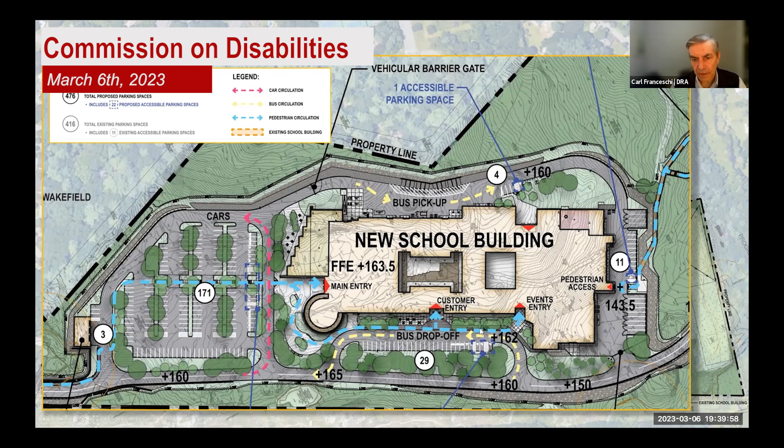If they arrive by bus in the morning, there is a bus drop-off here at the front, and access into the school, again all at grade, is available at those 3 access points across the front of the building.

If they arrive by car, driven by their parents or guardian, they're dropped off here at the main school entrance across this east or west side of the school, and can enter in there.

If they drive themselves and need accessible parking, they can make use of the accessible parking here in the main lot and enter the building. If they park in the lower student parking lot, they arrive at the building back here at this pedestrian entrance after coming up the stairs and ramp up the hillside where it's labeled 143.5. They can come in and access the school and an elevator right at that point as well.

All of these points have just a 6-inch curb with a curb cut away from each entrance. For parents dropping off their young ones at the preschool around the back, there is an accessible parking spot if the parent should need it, and an accessible entrance at grade directly to that preschool area. There's a playground directly off of that preschool area, also at the same level, without going outside, without dealing with the sloping ground or needing to use an elevator or set of stairs.

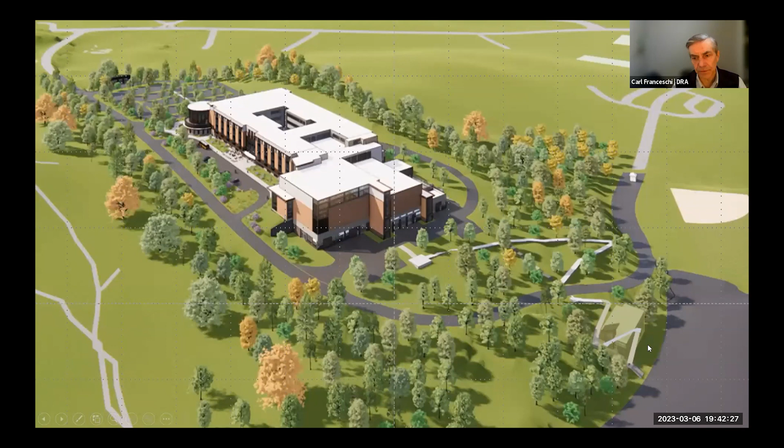So that's kind of the exterior of the building at the top of the hill. Just to give you an overall view, here's how it sits. The existing school is down here to the right, and the athletic fields and parking area will be down there. There is that connecting path that we'll talk about, and you can see the new driveway coming in from Farm Street, accessing the school and making a connection to Hemlock Road at the current guard shack there.

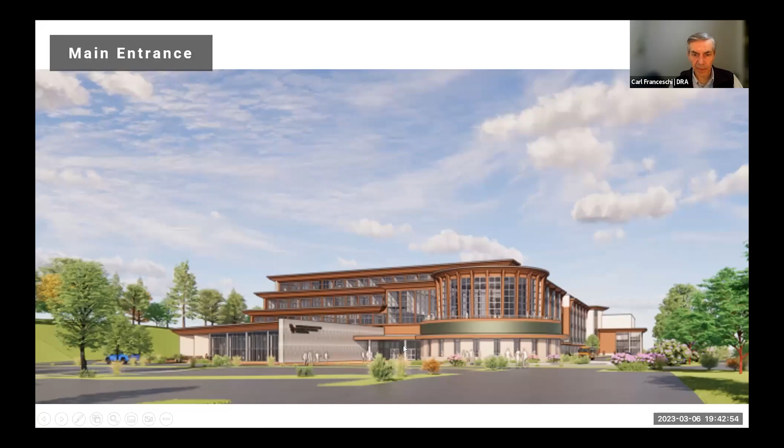And just to give you a feel for the building, as you come in from Farm Street, this is the main school entrance. This rounded portion of the building is the administration area on the ground floor, so there's good welcoming and supervision for visitors. The cafeteria is at this level at grade, and it has an outdoor patio, again at the same grade as the cafeteria.

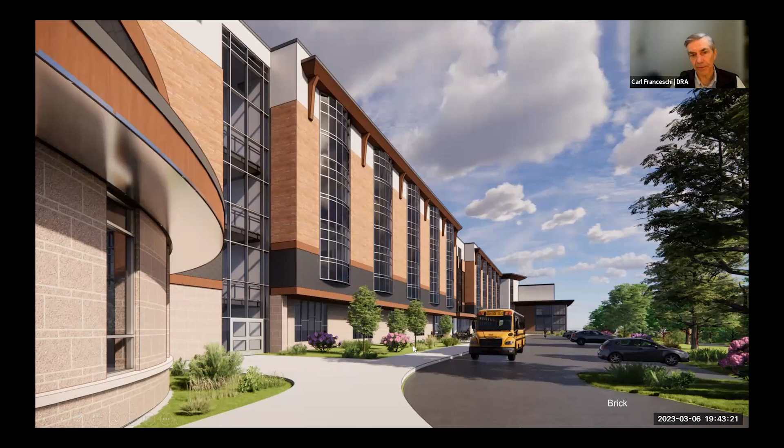Along the front of the building there's the bus drop-off and the multiple entrances along the front. It is essentially a 4-story building at this level. At the far end is what we call the events entrance, where the gym and the auditorium are located, and the customer access is in the center of this side of the building.

And then to talk about the inside of the building, first of all, it's best to say that the entire school is fully accessible and, to the greatest extent possible, universally accessible. As we mentioned, this plan is oriented the same way that site plan was, so the main school entrance is here on the left by the rounded portion of the administration building. There are 3 access points across the front of the building, all of them accessible and related to parking.

The center one being that customer entrance for the public that can come directly to the restaurant or directly to the cosmetology salon. The assembly areas are at the right-hand end of the building, the auditorium and gym, with a dedicated lobby and a dedicated elevator at this end of the building. Diagonally opposite, there's another elevator. So there are 2 elevators in the building that travel to all the levels and carry through each of the upper floors.

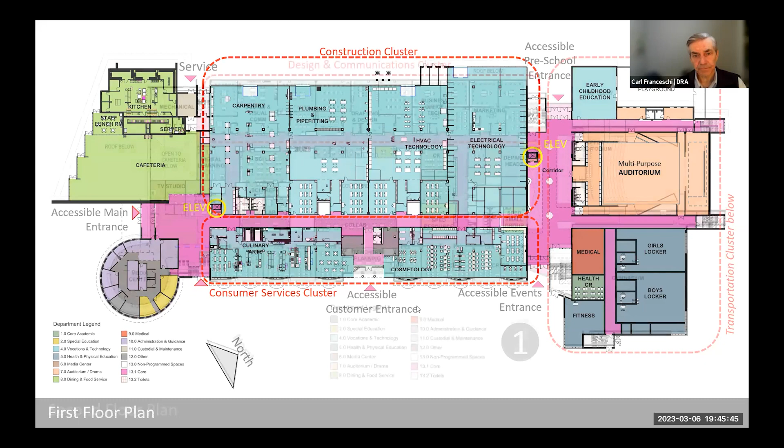The building is organized so that one of the goals of the project was to cluster the career shop areas together, so all of the construction trades are on this floor. Every level of the building is basically flat, with no internal ramps. Each of these large shops has overhead doors that can accept deliveries, and they're at grade as well. The cafeteria is at the left-hand end of the plan, and the gym and auditorium are at the right-hand end.

Going up one level, the building takes the configuration of a courtyard, getting daylight into the center of the building. The career tech areas are clustered together in blue, and the academic science and academic classrooms are in green, wrapping around the other three sides of the courtyard in close proximity to the career tech areas.

The elevators are highlighted there, and you can see them at either end. There are boys, girls, and gender neutral toilet facilities on every floor, and every one of them is fully handicapped accessible. Every shop individually has a unisex, gender neutral bathroom facility as well, fully accessible. Teachers' facilities are located in the teacher planning area on each floor.

Every bathroom, every toilet room, and shower area in the school is accessible. It's not that they're segregated and separated. Much like the superintendent talked about the academic classrooms, the same philosophy applies to accommodations within the building as well.

One of the other unique features of the school is this multi-purpose auditorium. I'll show you an image in a second, but as opposed to a traditional auditorium that has stadium seating, this actually has a flat floor on the first floor and a flat balcony on the second floor, so both levels are fully accessible. The seating itself is retractable, giving it a multi-purpose aspect.

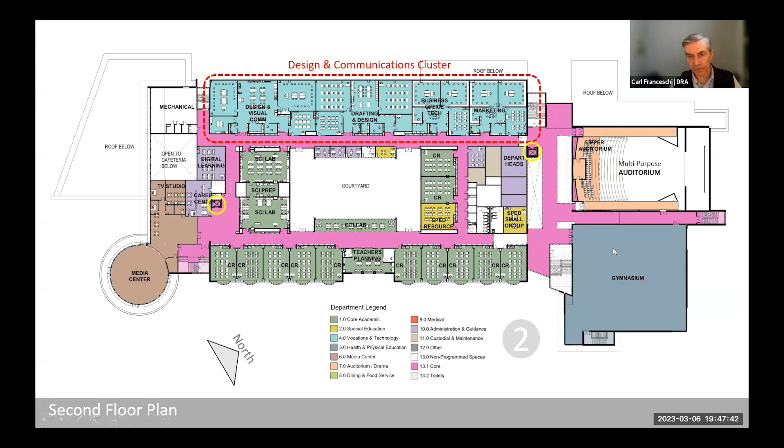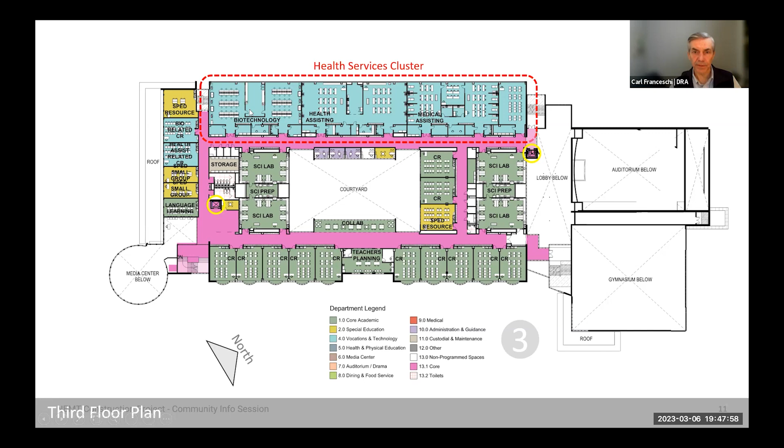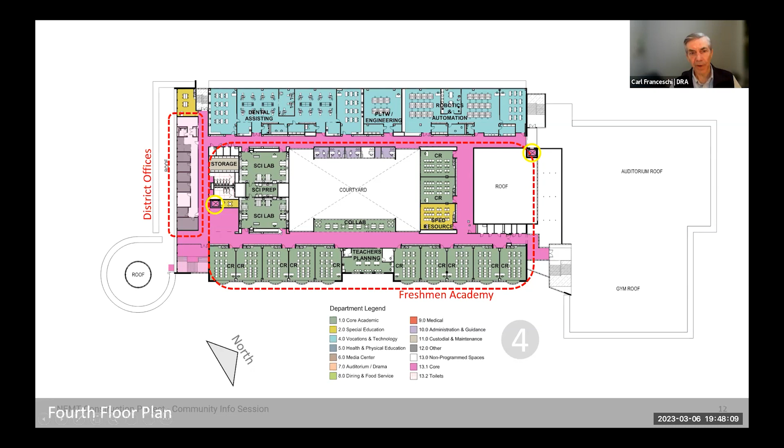Here's the gym, accessed by elevator and stair, directly above the locker rooms below. The upper two floors are very similar, just with different career clusters on each floor. Here's the health services cluster with that new biotech shop, and on the top is the balance of the career tech shops, the superintendent's office, and the balance of the classrooms wrapping around that courtyard.

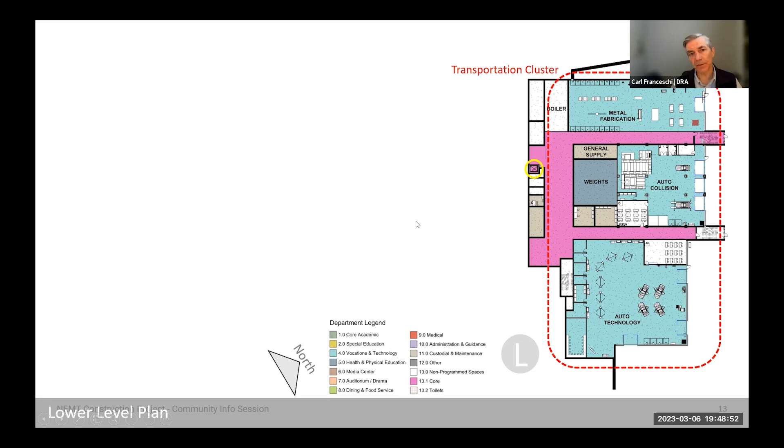Here's the lower level plan. As the building steps down the hill, there's the opportunity to have this lower level, which is built into the hillside on the uphill side, but totally out of the ground on the other three sides with full access at grade, both for pedestrians and vehicles accessing these shops. The auto shop and auto body shop are at this level, and this is the connecting point for students from the locker rooms going up and down the pathway to the lower level, hillside parking, and athletic fields.

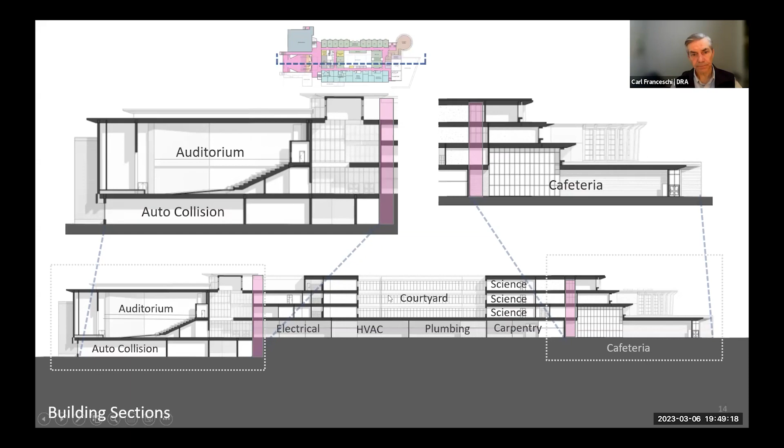If you were to cut a section through the building, this helps explain that it's basically a 4-story building with the cafeteria at one end, the auditorium and gym at the other end, and the building steps down one level at that end. There's a courtyard for the upper 3 floors to get light into all those classrooms, and there are 2 elevators, one at either end of the building.

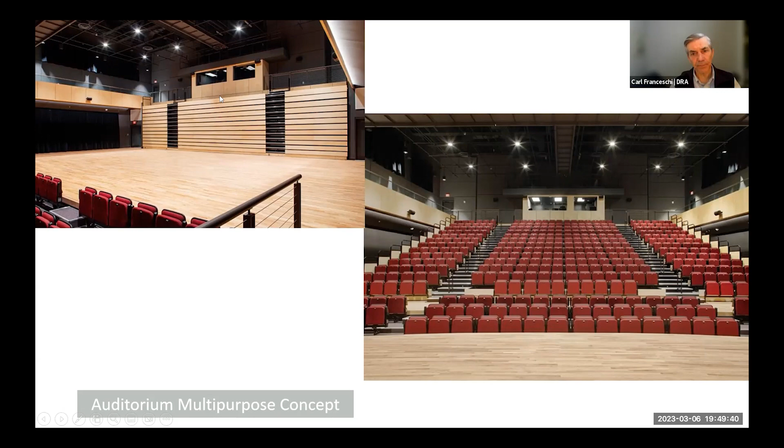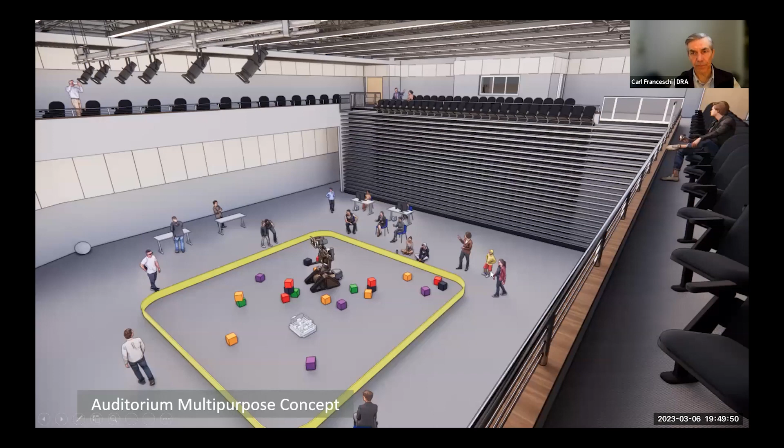This is that multi-purpose auditorium with the retractable seats. This precedent photo shows a flat floor, fully accessible, and a balcony which is also level and flat accessible, so the space can be used as a traditional auditorium when the seats are pulled out, but also for other events like robotics competitions, science fairs, and career fairs when the seats are retracted. The balcony is flat with handicap seating available at both levels.

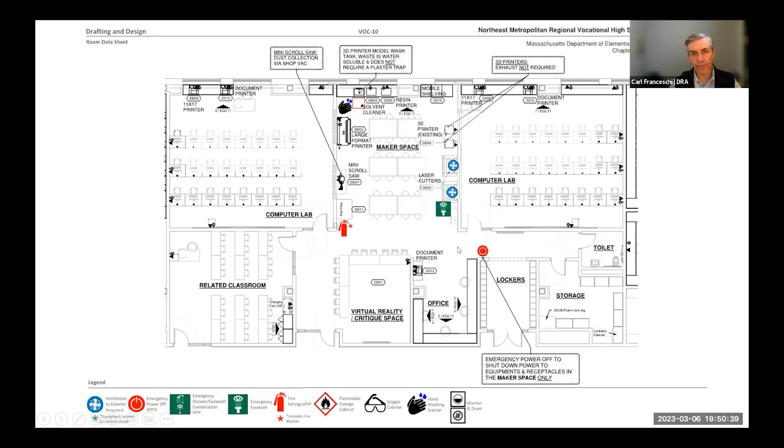And this is just the drafting and design, but we've done these kind of projections and layouts for every one of the 19 career shop areas, and again made sure that they are fully accessible throughout.

So that's sort of the inside of the building. And of course, we did have to deal with this grade change in the site that the school owns, making a connection from the lower level fields and parking to the building itself. There is a significant amount of accessible parking around the building for those who need it, but we did need to think about the connection from the building to the lower level in an accessible fashion. To help you understand the hillside, the current elevation of the student parking lot is about 84, and the level of the building we need to connect to is about 143. So it's about a 59-foot grade change there.

So we'd like to explain the series of ramps and stairs proposed to get us there. There is an alternate in the program for a satellite locker room with an elevator that may accomplish the first 11 or 12 feet of that height difference, but the stairs and ramps make up the majority of the path connecting the balance of it. I'd like to have our landscape architect, David Warner, explain the details and precedents.

Thank you, Carl. This is David Warner, principal at Warner Larson Landscape Architects. That section of driveway between the upper and lower campus is approaching about a 10% gradient. So the pathway through the woods has a twofold purpose: first, to make it fully accessible. A pathway along the sidewalk would be in excess of the 5% maximum gradient allowed by code.

The second reason we wove this pathway through the woods, and I want to show you examples as we go through the next couple of slides, is to preserve as much of that forest on the slope as possible. So this design has everything along the pathway elevated, with a substructure of galvanized steel framework and a decking system for longevity and durability using a slip-resistant composite decking material.

We've got guardrails around the edges with handrails for code-compliant ramps, and stairs with similar guards and railings associated with them. It's done in such a way that it allows the students to have this daily experience of walking through the woods going from parking to the school and back. We see this as a tremendous opportunity to provide an accessible route into the forest for educational purposes as well.

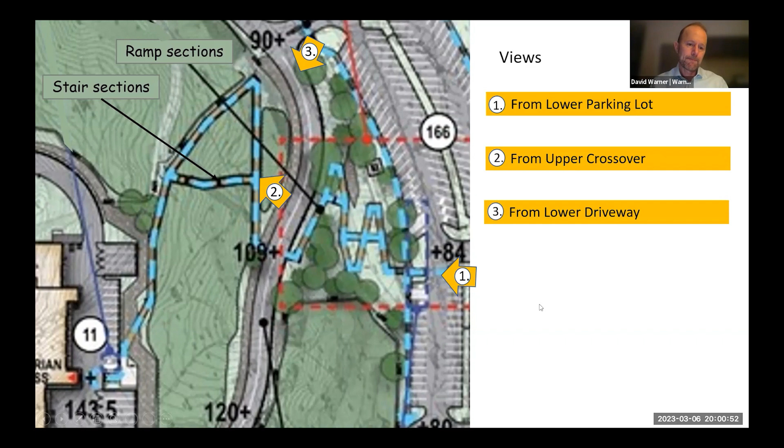So starting at number 1, from below, you can see how this ramp system and stair system is sitting pretty much right on grade. And then where it gets up to the driveway is up at the, just right about there. Yep, right there. So here is the intersection on the upper ramp and stair system where you can see the stair intersecting with the ramp system.

And the reason why we developed these 3D visuals to a much higher resolution was I think there was this perception that there might be a shorter route to go. There's that 59 feet of elevation change, and we're maxing it out with ramps that are fully code compliant. But there's no shorter way, trust me, to be able to get from the student parking lot to the building.

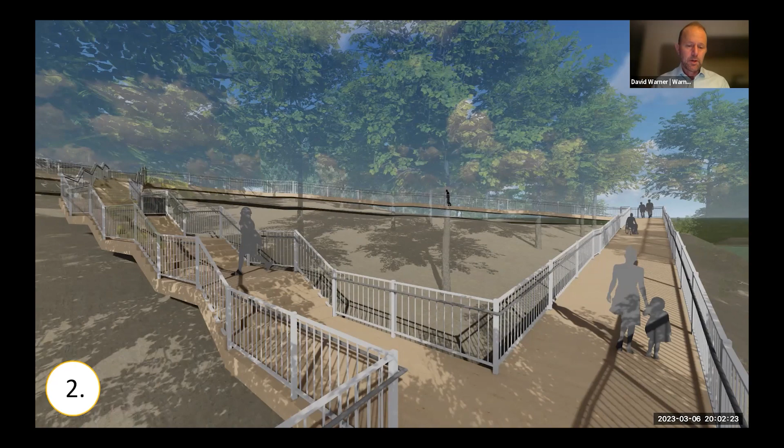One of the other prerequisites I mentioned at the beginning is that this is all elevated above grade. So if you were to put a ramp system down on the ground and switch back on itself, you're still going to have the same number of ramps between the lower campus and the upper campus, and you're going to have a lot more destruction. You're going to have to take out a bunch of trees and blast rock to get ramping in an area where the ground is rising up more quickly than the natural path of travel. So this is laid out as the natural path of travel for that purpose, to be elevated above the ground like those precedent images you saw previously.

Now, lastly, from this angle, what you're hopefully able to see is where the lower ramp system and the upper ramp system meet, and then come up to a turning point that switches around and heads back up to the school. It's interesting, on a steep piece of topography, when you put code compliant ramps at 8%, 8.33 is the maximum, but we generally design for 8 or slightly below 8% to build in tolerance, the ramps don't really appear all that steep.

We've put plenty of landings and resting spots along the way, so people can take it more leisurely. And the stairs themselves, like I said, also are broken up into shorter sets of stairs. So I think with this, from this view, it's pretty clear from that crosswalk that if you were to try to go from where the crosswalk is straight up to the building, it would be extremely steep. It would be somewhere 15 or 20% in gradient. And we have to make sure that the ramps are less than 1 in 12. So this is why the pathway follows the lay of the land, as you can see in this image.

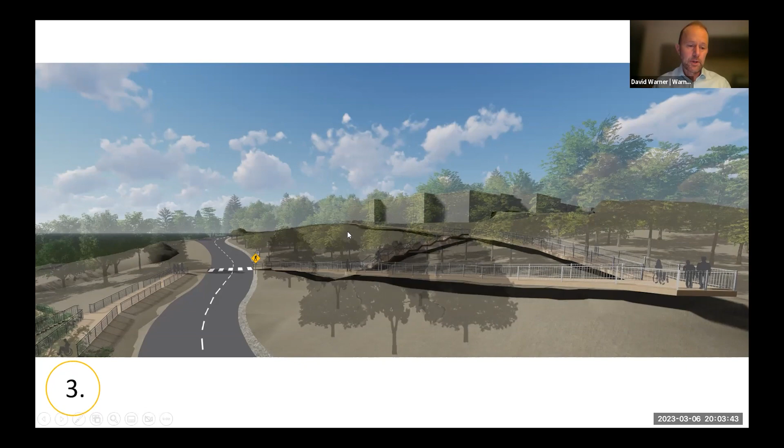Thanks, David. Just one last bit that we wanted to share with you to sort of put things in some kind of context is we found some other high schools, we're aware of them previously, and kind of summarized them here to compare with that 59 feet of grade change that we need to deal with from our building to, in essence, what is a common level of playing fields and parking areas.

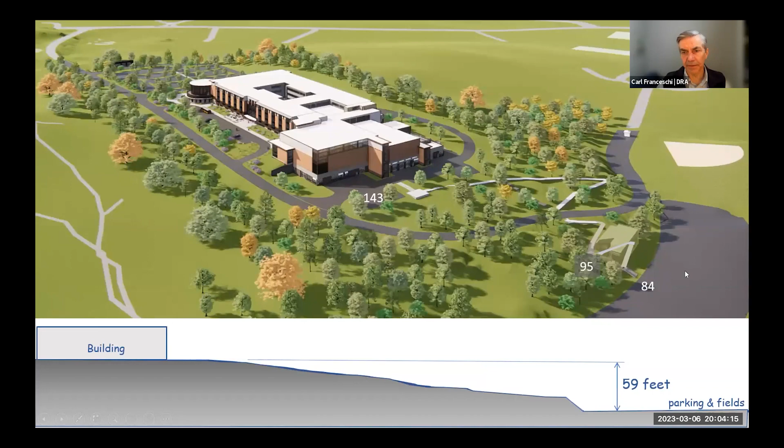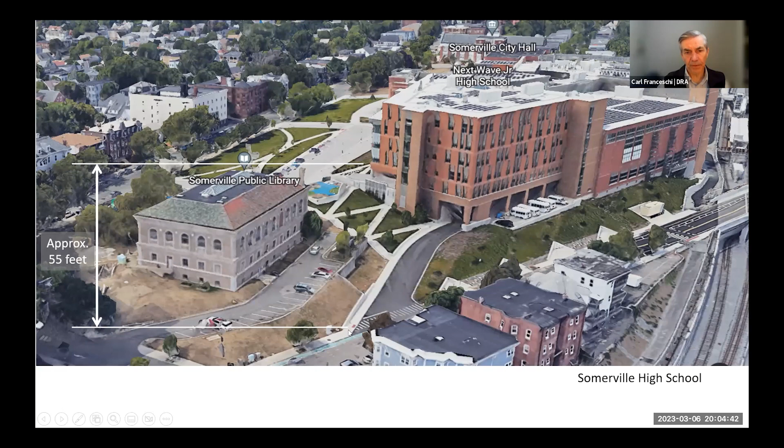Here are some you may be familiar with. North Reading High School recently opened a new high school. Their athletic fields are about 70 feet below the access point on the school. Somerville just built a new high school on a hill. You can see the switchbacks and stairs they had to deal with, about 55 feet to get from the public sidewalk to that entrance point of the school.

One that I'm very familiar with - my children went to school here in Needham. The student parking lot and the main varsity field is 45 feet below the level of the gym in the high school here. Again, with a student parking lot below and a teacher's parking lot up above, very similar to Northeast Metro Tech.

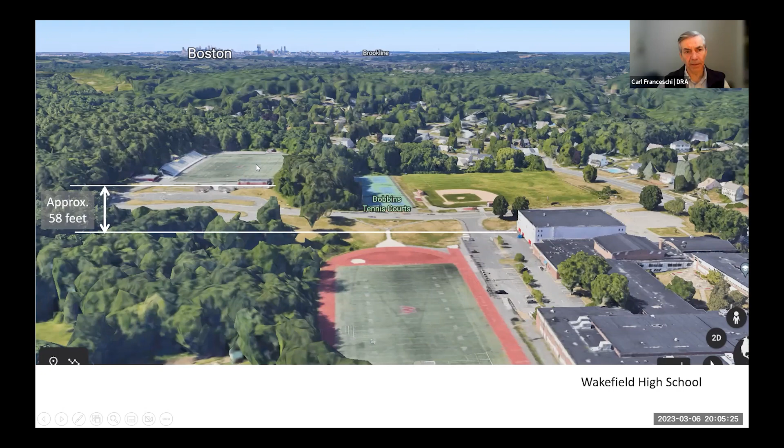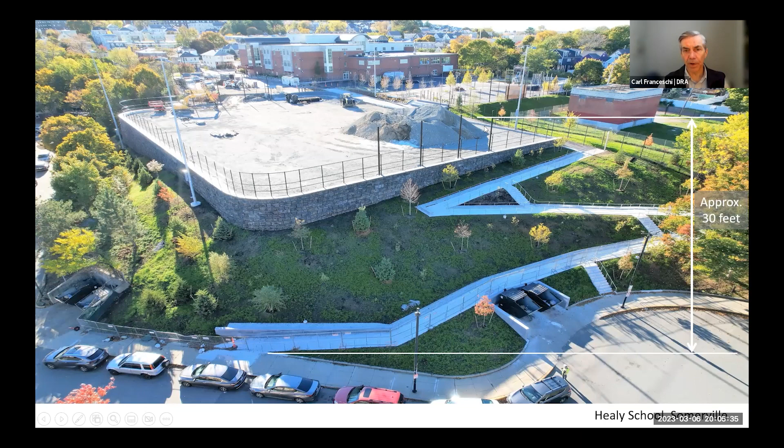And then right down Hemlock Road, Wakefield High School, their football field sits about 58 feet above their field house, the locker rooms there. Between the sidewalk and the switchback at the upper parking lot, it's a total of 58 vertical feet. Another school in Somerville, this one happens to be an elementary school, but just a connection between a public sidewalk and the school, 30 feet vertically.

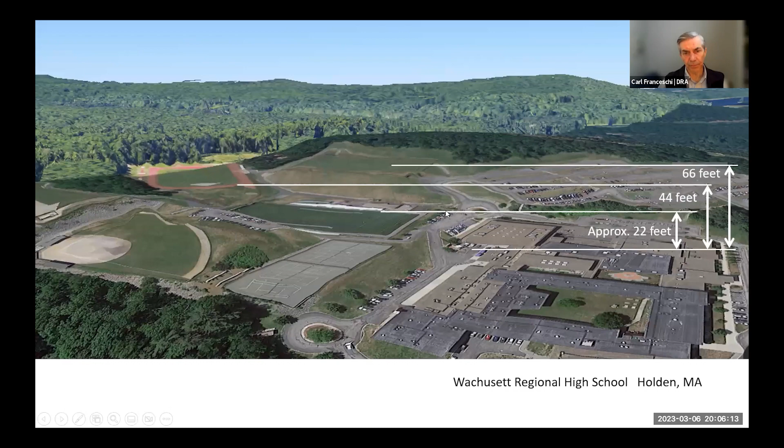And in Holden, Mass, Wachusett Regional has several terraces of fields, all of which are well above their high school and the access point on the building itself to the gym, ranging from 20 to 66 feet, these three different terraces to their athletic fields. And then the one many people might be familiar with is a college facility, obviously Holy Cross in Worcester.

Their gym and upper athletic fields are 240 feet above their lower athletic fields. And of course, it's a different client, a different student body and age group, we understand, but just to put things into context, we wanted to share that with you. So thank you very much for all that. We're happy to take your questions.

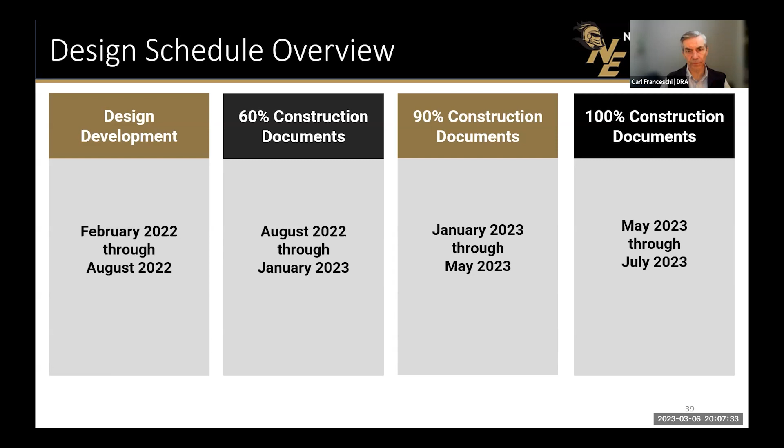We did want to just mention the schedule of the project to let people know where we are. We are almost approaching 90% construction documents, as of May 2023. We are actually looking to start construction as early as possible in the spring or early summer. We'll be 100% complete with construction documents by the end of June and bidding the project in July. But we are bidding early packages of site and structure right now, anxious to create this new high school for 1,600 students. The rest of the construction schedule will take several years, as you might imagine, for a project of this magnitude, with an opening somewhere maybe mid-year, January 2026.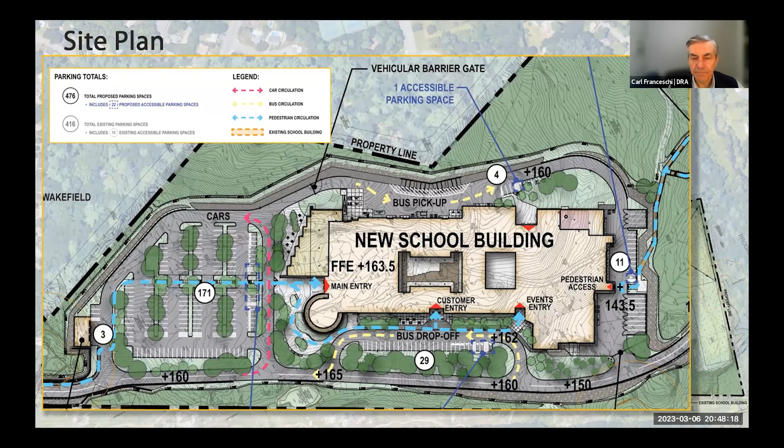Okay, it also mentioned down the bottom, vehicles should not be parked up against the slope or directly adjacent to the proposed catchment ditch. Where the bus pickup is, is that going to be next to where the ditch is? There's no parking next to the ditch. Okay, so that bus pickup is not next to that ditch. That's moving vehicles, there's no parking next to the ditch.

But it says bus pickup. So that means the buses will be stationary there to pick up students, where they could be stacked up? In the afternoon. Just in the afternoon is stacked up? Right. Okay. All right.

Madam Chair, question, are these accessibility questions? Well, they're yes and no. I'm not sure, because the way they changed the route, it was brought up when you were describing everything, so I figured that was part of it. To me it's more of a safety issue. On the next, is the Accessibilities Commission. Okay.

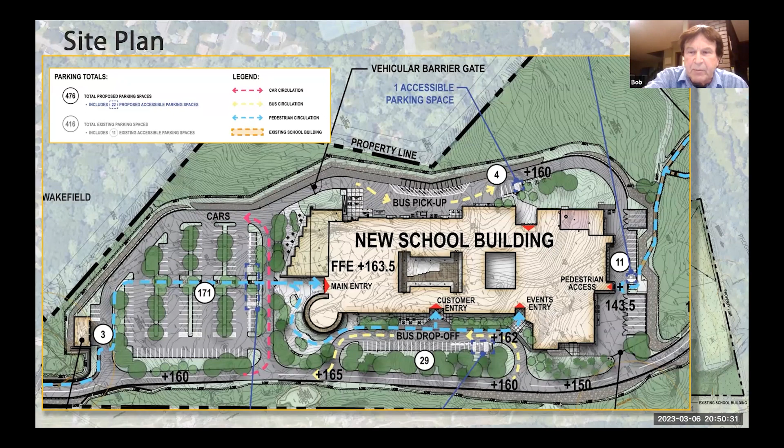Okay, where the grade change is, you can't see it because the pictures were on the left, but it showed the grade change of 90 to 120. So there's a 30-foot grade change. Yeah, that's right here, 90, 120. Okay, so there's a 30-foot grade change right here, okay?

When students come in, are they primarily going to come in the new access road to go park in the down parking space, or are they going to be coming up Hemlock Road? Depends on where they're coming from. Like most drivers, they're going to seek the most expedient route, depending on the traffic, the time of day. It's hard to predict. Okay, because I was just curious if there's going to be enough safety features where a car is going from 120 feet down to 90 feet, a 30-foot difference, and what speed control will be at that location.

I guess there's no answer. That should end my questions. Thank you, Madam Chairman. Thank you. Next, Paul Rybicki.

Good evening, Paul Rybicki, Wakefield. I just wanted to point a few things out. The first one being that the elevation of the school is really not at 143, that's the shop level. The real level of the school is 163 for the main entrance, which gives you basically almost 80 feet from going up the steps. Am I correct?

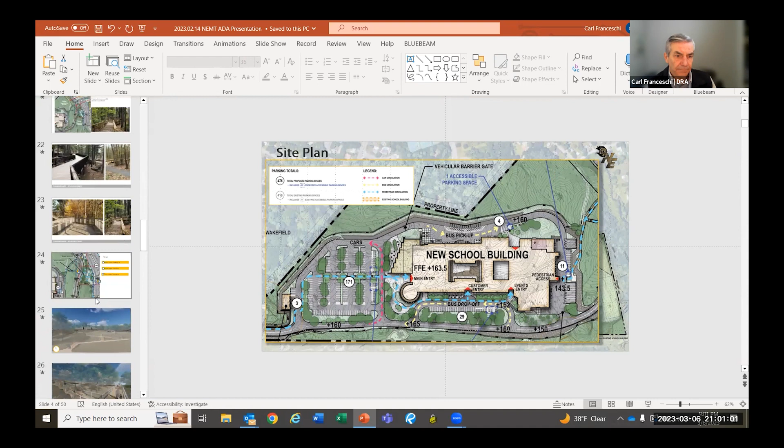I guess it's, yeah. And there was another one that showed, I guess, more of a bird's eye view—not of the walkway itself, but of the whole school. I'm sorry, I misdirected you. Not this one? No, it showed the parking lot on the left.

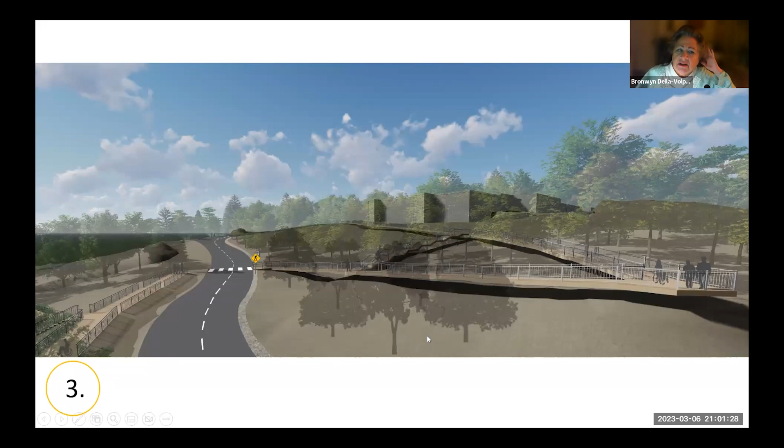These are the latest ones. The earlier one is purely schematic. This one? No, it shows more of, I guess it would be the western end of the school, I think.

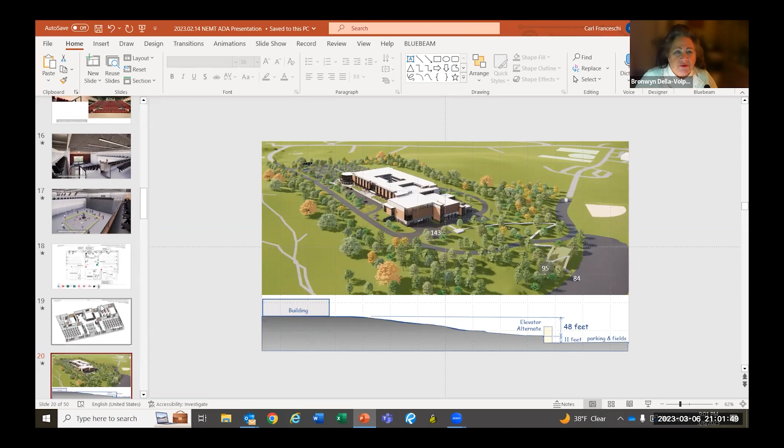Do you have a rendering that shows the western end of the school? Yes. That, okay. Now where are the stairs going to be? They're inside the building, you can't really see them from this exterior view. No, the exterior stairs is what I'm talking about. Oh, down the other end of the building.

Okay, all right, this is the west end. They're on the east end. Can you please show me the best view of that? Well, there really isn't one. This one? Well, no, isn't that—that's the east end. This is the ramp coming up. Where are the stairs?

Those are stairs right there. I see 5 stairs, where's the rest of them? This is the only view that showed stairs other than the ones you just mentioned. I'm sorry, I guess I'm confused because I thought there were like 100 stairs or something like that. And then you said it was down to 60 stairs? That's correct.

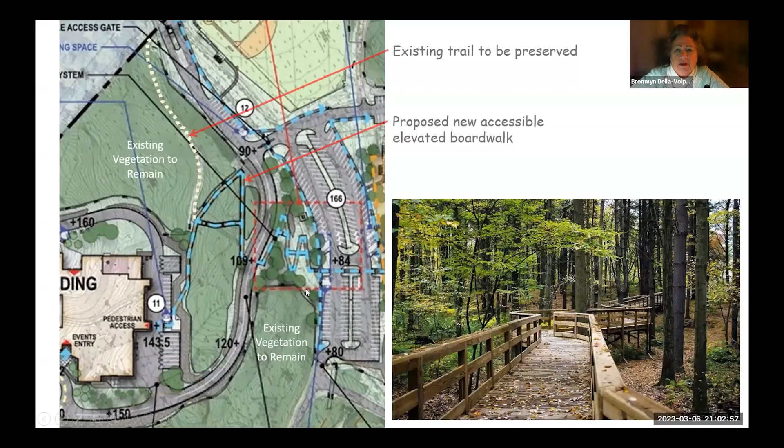Okay, and where are those? Do you have one showing those? Yes, just a moment. Thank you, I appreciate that. Right there. Okay, oh I see, okay. All right, thank you, thank you very much. Those visuals are really, really helpful.

I think I had a question too. The advisory meetings are on Zoom, is that correct? I think Mr. DeBerry said that. The advisory meeting—I didn't say we have advisory meetings. I said I have an advisory team that I work with. I can have them, they're informal meetings. They're not part of the building process because 90% of what we do is Monday through Friday from 7 a.m. to 6 at night, so it's not an official meeting.

It's people who advise me on different aspects. Oh, I see. I'm sorry, I misunderstood because you invited someone else to join those. Yes, and I said those meetings—because she had mobility issues, I said she could be on Zoom if she needed to be. Okay.

All of the intro information is fine tonight, and I do appreciate particularly these new renderings, but none of it really addresses the reason why we're here tonight, and that's the concerns of this highly bifurcated campus, the upper and lower campus. The stairs and the ramp are impediments. There's no getting around that. You can call it a nature walk.

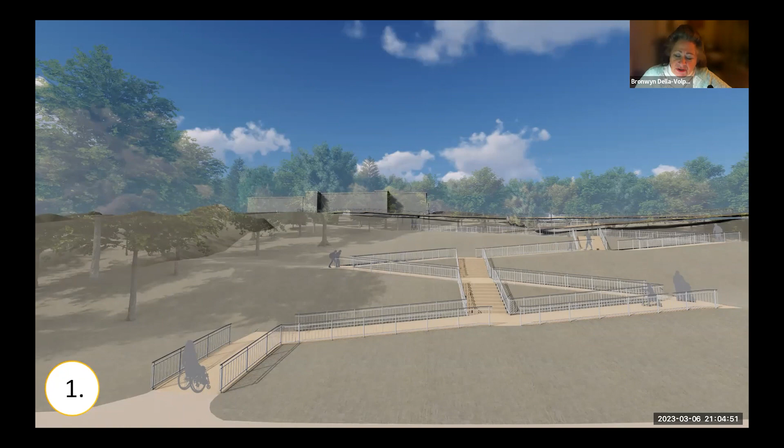Whatever you want to call it, but they are impediments. And I consider myself an able-bodied person, and man, I would not want to be going up and down those stairs, particularly at night. So I just think that there's been so much expense and mitigation and planning that wouldn't have been necessary if the school had been built on another site.

And I know Mr. DeBerry said that that's not possible, but he really didn't offer any specifics as to why. Right. And I think that the ramps and the stairs, the design itself, belie the words that say we're concerned about safety, and we're concerned about being an inclusive campus. The design itself is not inclusive. Right. And I'm very concerned about that.

So again, to go back to my intro, in 20 years I'm so happy to get together people from the disability community. And again it's sad that we're having discussions that have been discussed at other commissions and are discussed at our school committee meetings and our building committee meetings when people show up. I wish we could have taken more advantage of the disability issues tonight. And I'd love if there's people out there who have questions, not about the selection process or safety, but that'll come in future meetings. Their disability questions, because those are the people who we're here to talk about and who we're trying to make this project the best possible project for.

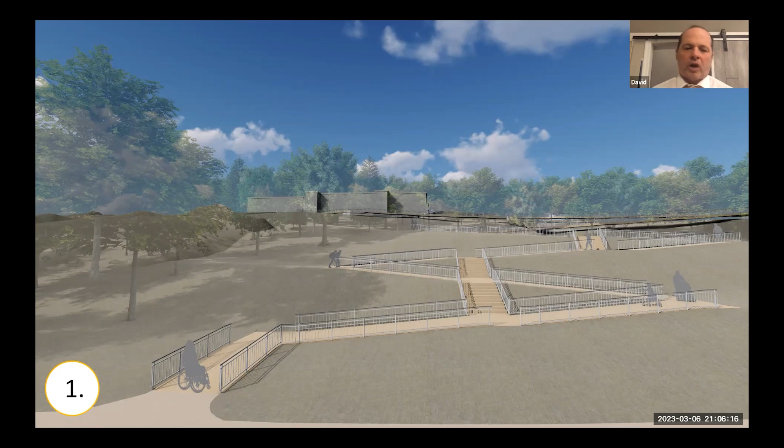Right, and I so think that you've had a lot of input as to how to make this project even better. If I could interrupt, I'd like to get to the 4 last people that have their hands raised, because it's getting late. Thank you, I appreciate it.

Jennifer? Yeah, hi, I'm Jennifer Fanning from Wakefield. I do think my question relates to disability. If Mr. Franceschi would be willing to put up the site plan picture that shows the aerial view with the ramp and also the lower parking lot in it.

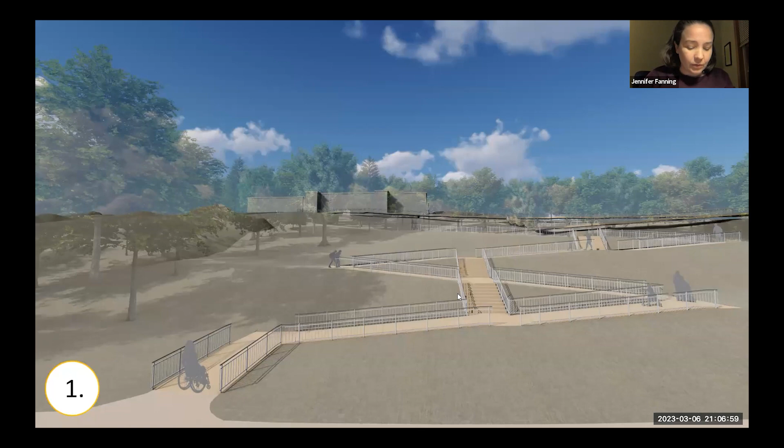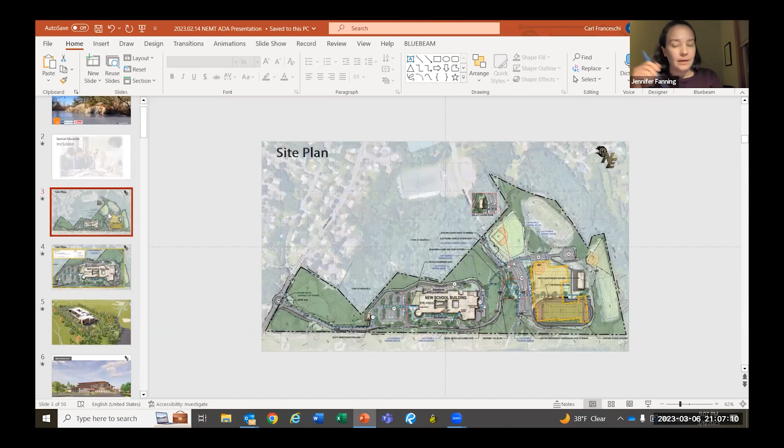I have two questions about, well, I guess a question and a concern about the road. It looks like students who use both the ramp and the stairs to get up to the school, either for their school day or to use the athletic fields, will have to cross a road. I understand that road is too steep for sidewalks. So my first question is, what is the grade of the road?

So the grade of the road is around 9 to 10% along that section, but we do have a leveling off area at the crosswalk. One thing I didn't mention, but since you brought it up, we do have a flashing beacon for a pedestrian crossing facing in both directions there, as an indicator for a pedestrian, a safe pedestrian crossing for drivers.

I'm glad to hear that beacon will be there. I do have concerns about students crossing that road at all times of day, in all different weather conditions, with the road being so steep, because it requires not only the first car to stop at the crosswalk, which means they're not on their phone, they see the lights, and they stop for a student, but it means the cars behind them have to stop on time as well. And if any of them don't, then you have a series of collisions that I think puts students at risk as they cross that road.

Every day, morning and afternoon, but also I'm sure throughout the day. And my next question is about around end of day when students are leaving the school, with the campus being split into an upper and lower campus, with the athletic fields being on the lower campus. Looking at this, it looks like students who participate in athletics, either as athletes or as support staff or friends, or just want to participate in all of campus life, which I hope all students will be able to do, will have to cross not only the steep road to get down to the lower campus and the fields, but then it looks like pedestrians will outlet essentially onto the parking lot, where they'll then have to cross the parking lot to get to the fields.

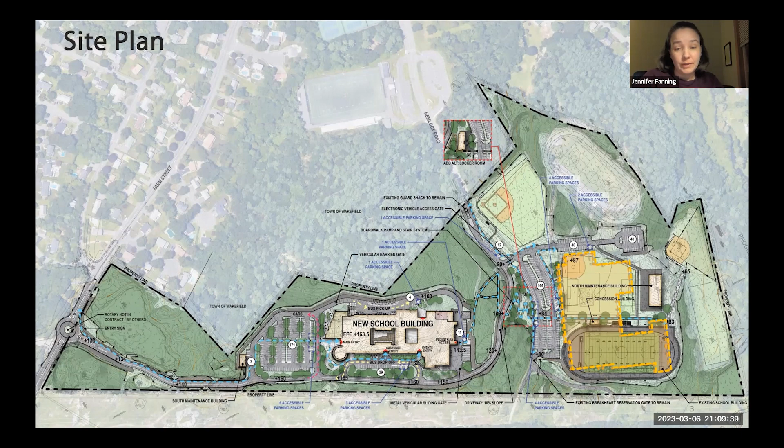And it looks like there are several points where students might sort of flood across the parking lot at a busy time of day to get to all of those athletic fields. I do think it's a disability issue. I think some students are more susceptible to being injured by vehicles the more they have to cross various roads, especially when they're steep.

Sure, I can answer that. I mean, again, it's a safety issue that we're working on. And currently we have 18 staff members at the current building who work and do parking lot security and parking lot monitoring at the end of the day.

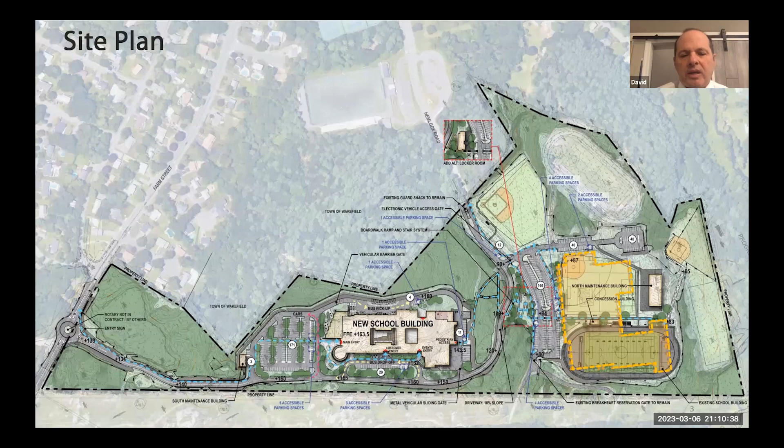So those are contractual positions. It's part of our teachers union contract that they have all department heads do parking lot duty, as well as all of our security and all of our building level administrators. So it's something that all schools deal with, that we will have a person stopping traffic. We will have a person at all access routes that students are entering and exiting. So it's something that we are currently dealing with, and we do a great job, and we will do so with the new campus as well.

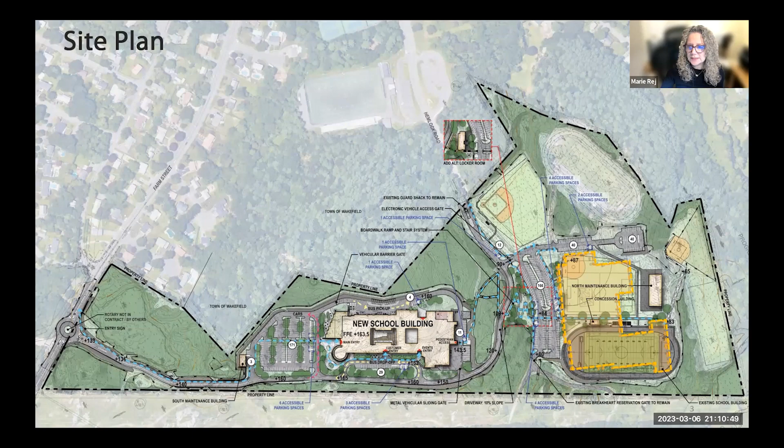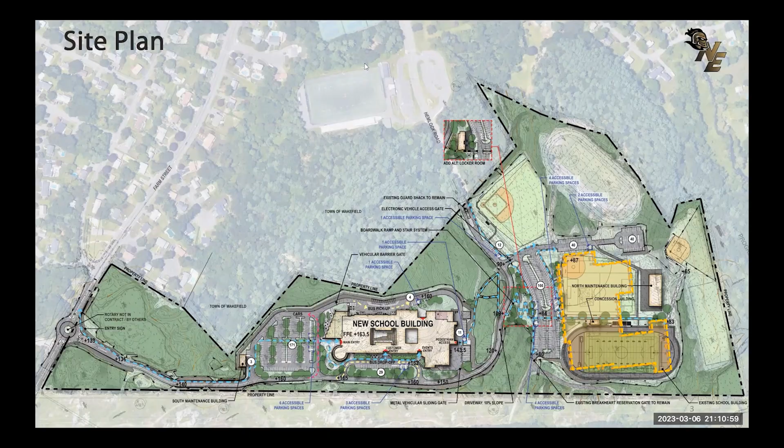Hi, thank you. I'm a Melrose taxpayer. I have an autistic child, and I have to disagree with this design. I do care about the forest, but after learning about the design, I need to point out that my autistic child won't ever take an elevator, won't ever take a ramp, won't walk to the school the way that this has been set up. She has significant noise challenges. Any changing or chaotic situations will be a major deterrent to any child that has a disability, including alterations to everyday schedule. So I just want to make it clear that although people seem to think that this is a great setup and kids are going to love it, there are children who have neurodivergent situations that will have major challenges with the way that this design is implemented.

And I haven't heard anybody talk about that at all. I know that we're talking about mobility situations, but there's also other disabilities that appear to not have been taken into consideration at all. So what are you going to do with a kid who won't get into an elevator or won't go up the ramp or is going to refuse to go to school because they have all these challenges that they have to overcome? It just doesn't seem feasible. It really doesn't make any sense, in my opinion.

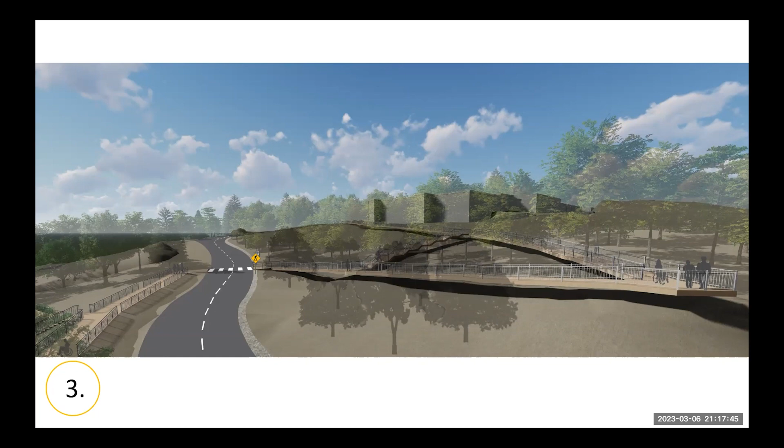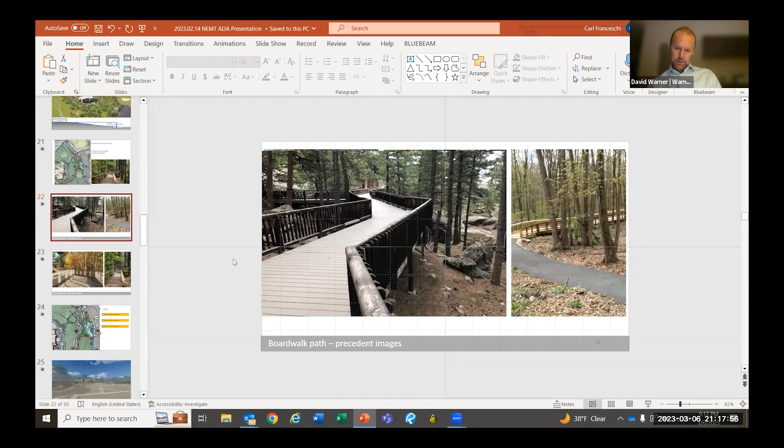Madam Chair, I can respond to that slip resistance question. Composite decking comes in all shapes and sizes. Some have more plastic ingredients than others, and the other primary component is like a sawdust component. Depending on their ingredients and surface texture, the slip resistance varies considerably. We've looked at that really closely, and our specifications are written to only accept materials with the highest slip resistance, so they will be code compliant on a ramp at 1 in 12.

But I totally understand the slipperiness from an experiential standpoint. Just out here where I live in South Boston, DCR has two different decking systems. One was installed later than the other. They used pure plastic decking on a portion of the boardwalk, and the other portion has the higher slip resistant product. When I'm out there running in the rain, the pure plastic is very slippery even though it has a texture to it. So I'm very familiar with that as a product, and it does vary widely, and we're only specifying the product that does have that slip resistance.

We should mention also, David, in our research, the photo on the left there I believe is Mount Rushmore, a national monument that's installed this. And DCR's property at Purgatory Chasm in Massachusetts is also installing a similar system. Correct, yep. So it's not something that we're taking off of a residential back porch — it has been done in other similar settings.

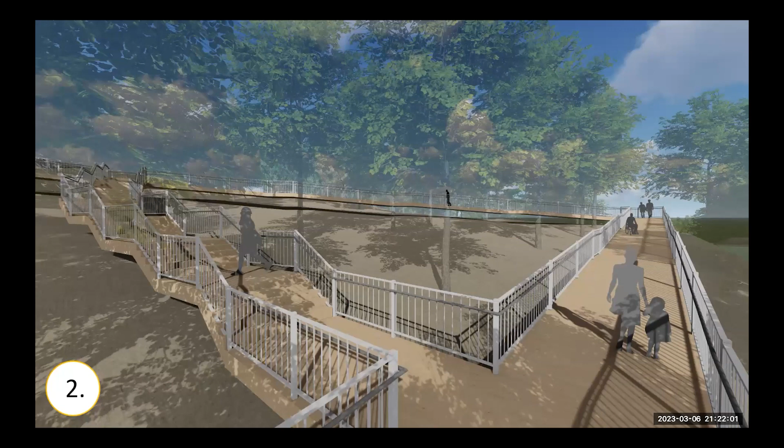Thank you. And Megan? I'm Megan McDonough from Melrose, and I am a disabled person. And I would like to just point out that for us, safety is a disability matter because it affects how we move through space. And I think we are all here tonight because we care about that. In my professional life, I did help people move through space. I would build an environment and then in a week, sometimes move 126,000 people through space in San Francisco before I got disabled, with other large crews of people.

And I'm wondering, I have a number of questions, I'll try to be quick. With that ramp, if the rails will be removed in certain places, but a double railed system is ADA compliant, how could the rails be removed in certain places?

Madam Chair, at landings where you have a level landing that's close to grade, anything less than 30 inches does not require a guardrail. So those are locations that would not have the guardrails alongside them.

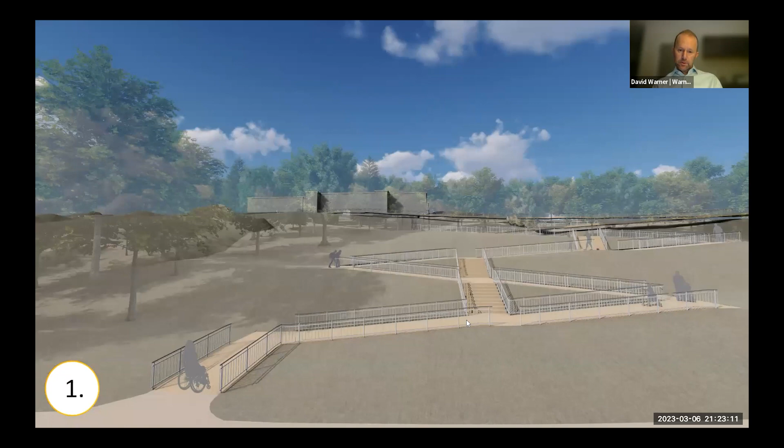And are we being shown landings that are flat, or I think that what I'm seeing is stairs crossing the ramp and not flat landings? Is there a picture where there's flat landings too? Every 30 feet, there is a flat landing. It's maybe a little hard to see. Yeah, this view, I think, is easier to see the level landing.

And then is it required for every so often on a ramp to have a toilet facility? Every so often in this built environment for someone to be able to get to a toilet, is that in the ADA? Not to my knowledge. When you get on the ramp, you're on there for the length of it, right? You can't just be like, oh, I have a condition, I have to use the bathroom, and get off of it halfway up.

I think that's the case in even a long parking lot. I'm just not aware, Megan, of any standard. Okay, I can ask the Architectural Access Board because I am curious.

And then I don't see lighting systems, but lighting system is part of ramp systems, right? Is that correct? That is correct, yes, it's intended to have lights on it. They're not shown on this rendering. Can you tell me what the estimated cost of this ramp is?

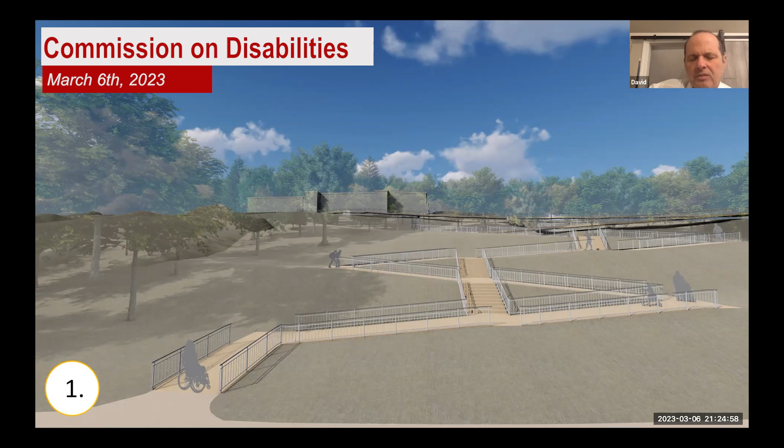Again, that's not, we're not thinking about cost when we think about students and community members with disabilities. So I'm just thinking if there is this other document that I've seen in the project documents about alternate sites where at least one meets the educational program goals, that doesn't seem to require a ramp. So I'm just wondering, as a cost comparison, if you actually don't have it broken down, then that's fine. I'll move on to my next question.